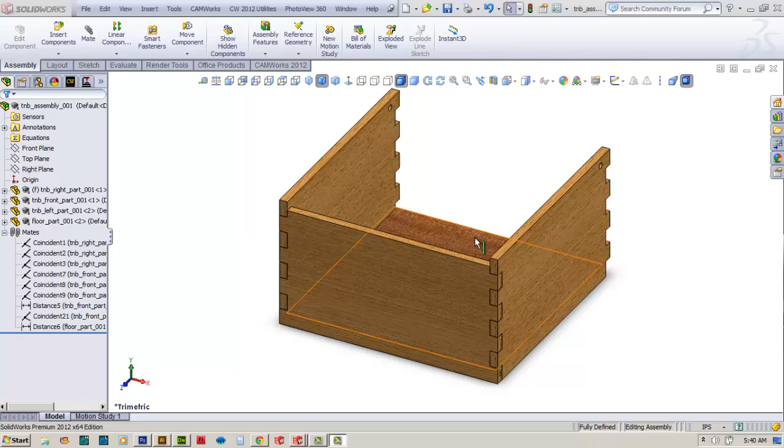As you can see, we're progressing with the design of our table napkin box. I've brought up the assembly so you can see where we're progressing. At this time, we need to come back and design this back wall part, as you see right here. With the back wall part, that will complete the actual shape of our table napkin box, and it will also allow us to move forward with other parts as well.

I've gone ahead and created a new file called Part 7, and I'm going to save it right now so we'll know how to get to that file when we need it later for the assembly. I'll save this in my napkin box 2 folder, highlight the word Part 7, and call this TNB_back_PART. Since I like to do version control, I'll add that in as well before saving the file.

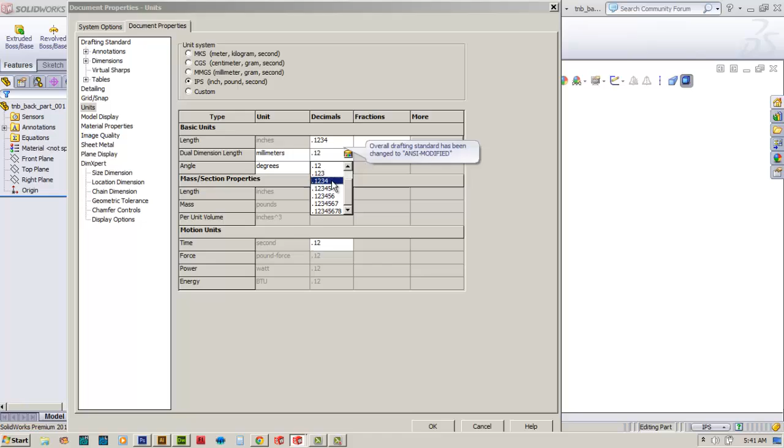Now that I've created this new file, I need to do a little housekeeping first. I'll set my favorite background color to white, then edit my units to make sure I'm at 4 decimal places. I'll click on that, come down to 4, leave the angle dimension alone, set it here, and accept that as well in case I need to do time motion.

Now we're going to set ourselves normal to the back plane. I'll click on front plane here, and it'll help me go normal to it, which will in essence be the back plane that I'm actually creating for my part.

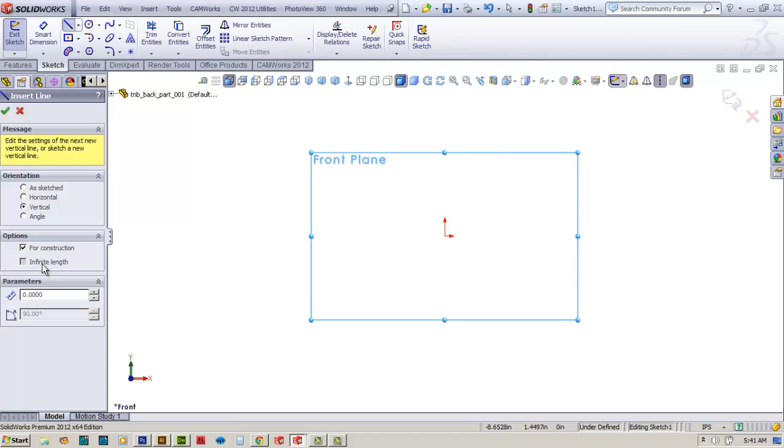With that done, I'll select center line, choose vertical, infinite, and click on the red datum as you see here. As with the other parts before, I'll add a horizontal piece to this as well, and another horizontal center line up here. Check this off, check that off, then right mouse click and go to Smart Dimension. From here, I'll create the distance, which is 4 inches on the height of our box, giving us the working parameters for our part.

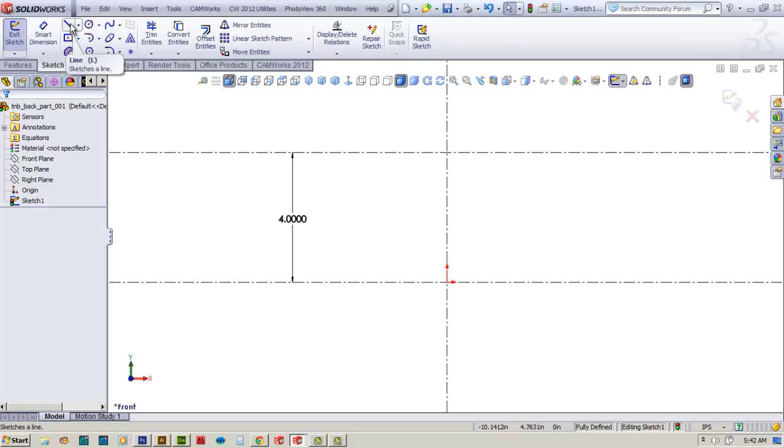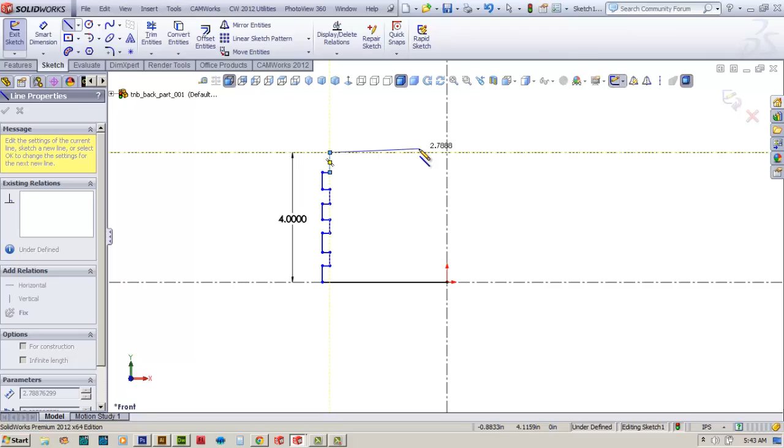Now, check that off. Since I'm still in Sketch, I'll go to the Place Line command. I'll start here at the datum and come across to about right there. I've got to make 4 fingers on this particular part, always trying to keep a little bit under the size I'm working with. I'll come over here and go back to the center line I started with, hit escape, and there we have our basic shape.

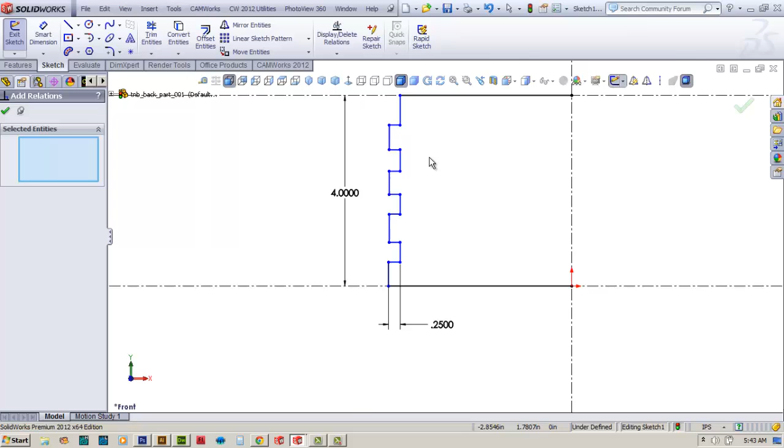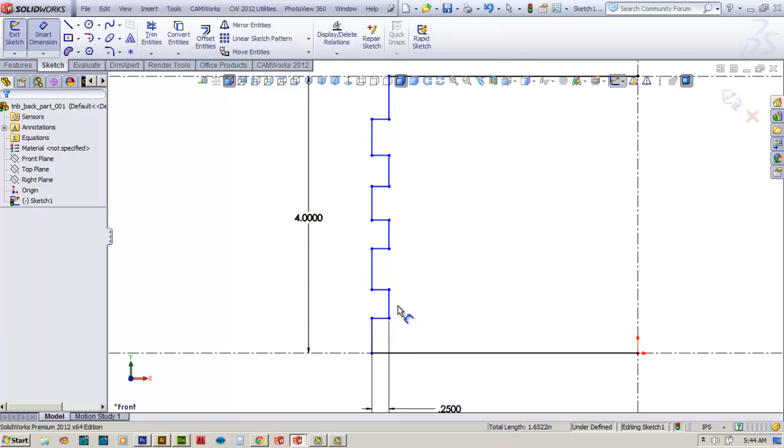So now, as with the other parts, I'll set the dimension and depth of the finger joint itself, taking that up to 1/4 inch, 0.25. I'll check that off and immediately add relations, starting with the first dimensioned one. I'll go up the vertical, grab all these finger joints, and make them all equal as before. Then with Smart Dimension, I'll start dimensioning the actual joints themselves, the fingers, which are about 1/2 inch.

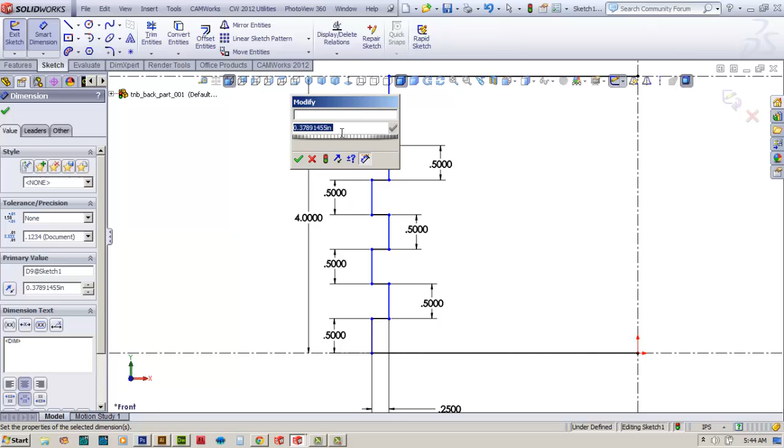I do not have to dimension this last piece right here because we already set the dimension to 4 inches, so that should be sufficient for this side of the design. We'll rebuild our document with Control B, and then save it with Control S.

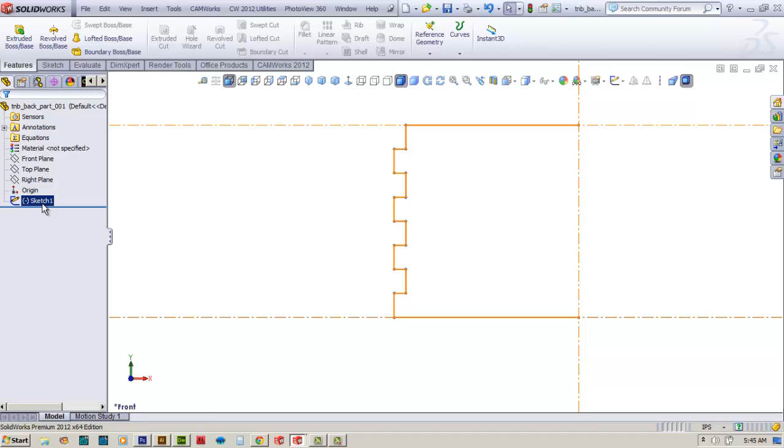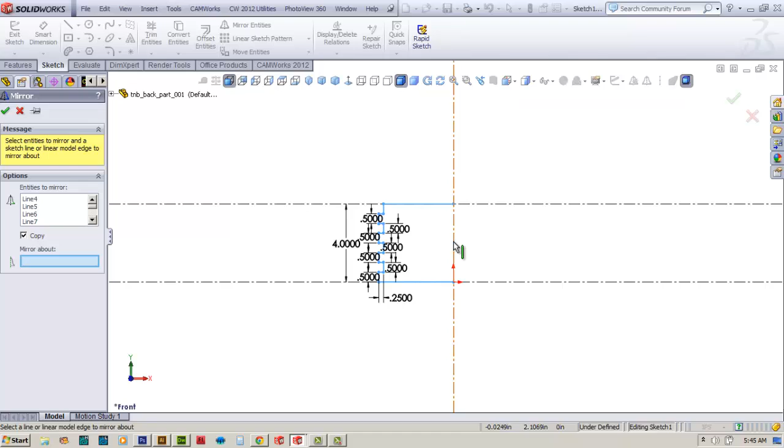Now that the document is saved, I'll go back to my sketch, right mouse click on it, and edit the sketch. I'll zoom out with my middle mouse button, then use mirror entities. We'll use a polygon, left mouse click and drag, and highlight all those, then say mirror about the center line as you see here. Again, it previews in yellow so you can see your intended mirror design. Check that off.

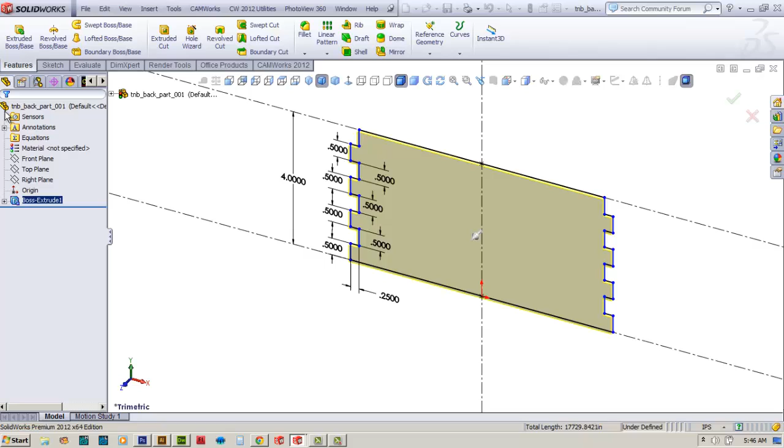While still in sketch, I can immediately go to features and do an extruded boss base. When I do that, SolidWorks rotates around and shows me it's only set to 1/10 of an inch, so I'll increase that to 0.25, the thickness of our wall. Check that off, and the part comes up like we want.

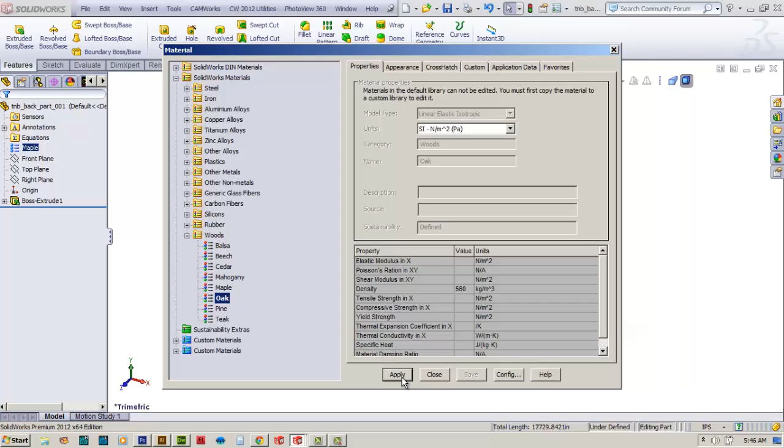The only problem is it's the wrong type of material, so we'll edit that too. I'll go back from making it look like steel by collapsing steel, come down to woods, and grab maple, hit apply and close. Oh wait, we're going to make that oak instead, so hit apply and close. So there we have it, and our wood grain direction is going the correct way, horizontal, so that's good. Control B to rebuild, Control S to save.

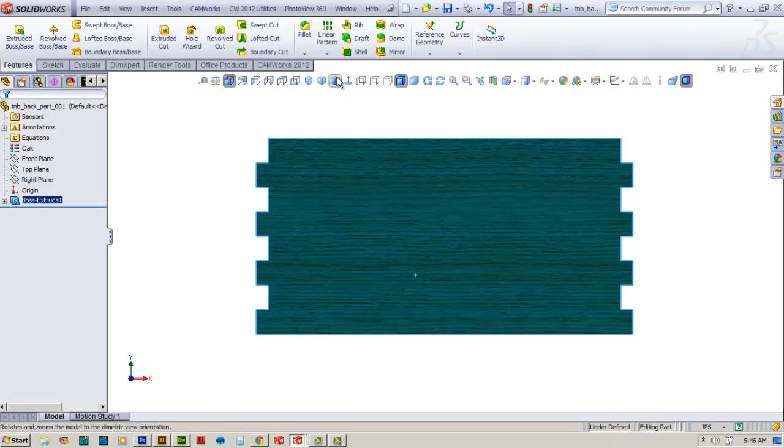Now what we'll do is set ourselves normal to that face. To select the face, you come up here on your heads-up display, or you can right mouse click again and get it off the mouse menu.

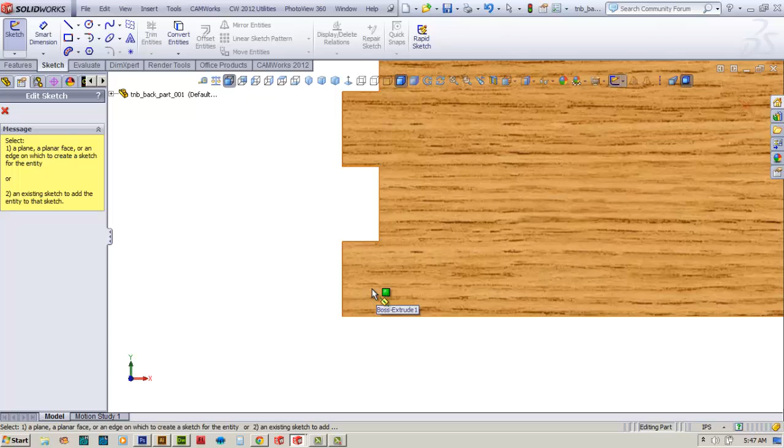With that done, we'll hit Sketch, and this time instead of corner, we'll go to corner rectangle, and come down here making sure it says select the plane, so we'll select that plane again. It highlights in the dotted orange line, making sure not to hit that center point, so we'll come off of it a little bit, scroll out, then scroll back into the area we want, again making sure we don't hit that midpoint so it doesn't set up an unnecessary relationship.

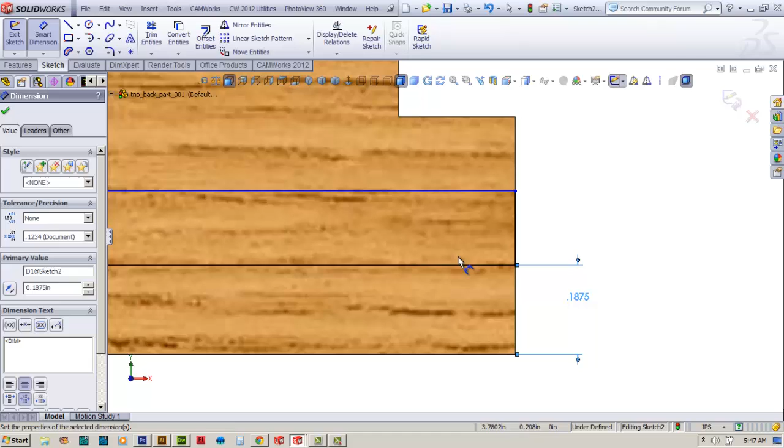So we've done that. Go back to Smart Dimension, and we know the slot we're going to cut for the floor is going to be 3/16 of an inch, which would be 0.1875. And then the slot we're cutting is going to be the girth or width of the blade on our table saw, which will be 0.125, an eighth of an inch. Accept that.

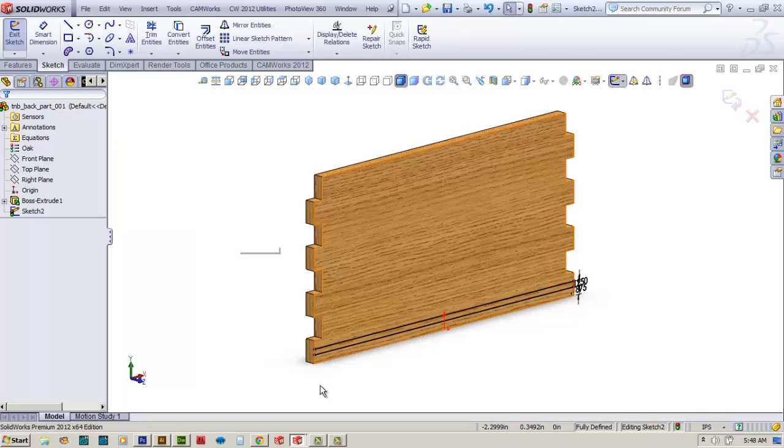Now we'll check that off. Go ahead and hit the F key to fit this. Use our arrow keys to rotate around. We'll zoom in using our mouse, and go to Features, Extruded Cut.

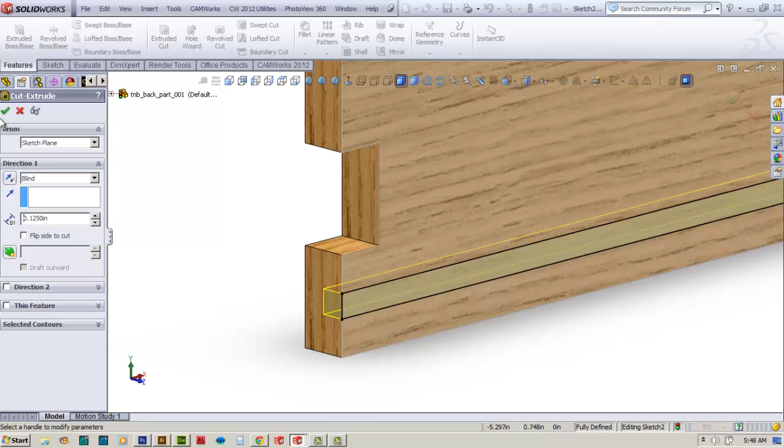Now on the Extruded Cut, because we had 1/4 of an inch last time, it thinks you're going to go 1/4 of an inch again. Easy thing to do there is just put a slash and a 2, which will divide that to 1/8 of an inch. So we've divided that to 1/8 of an inch.

Now we'll hit the F key again and zoom out, do a Control 7 to set it to perspective view. In this case it's going to be the isometric. And we'll go ahead and rebuild and save our file.

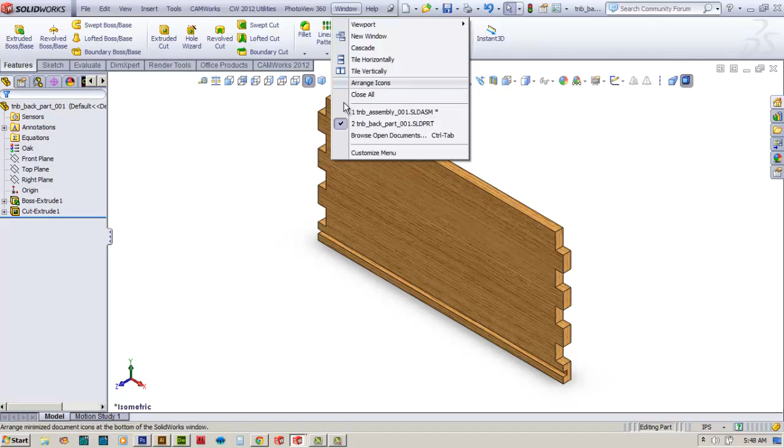Now what we need to do is go ahead and put this part in the assembly. So we'll come over here to the Table Napkin Box assembly, which I already had up. Click on it, and I'll transfer us over there. I'll do a Control 7 here, zoom out a little bit so I have some working room.

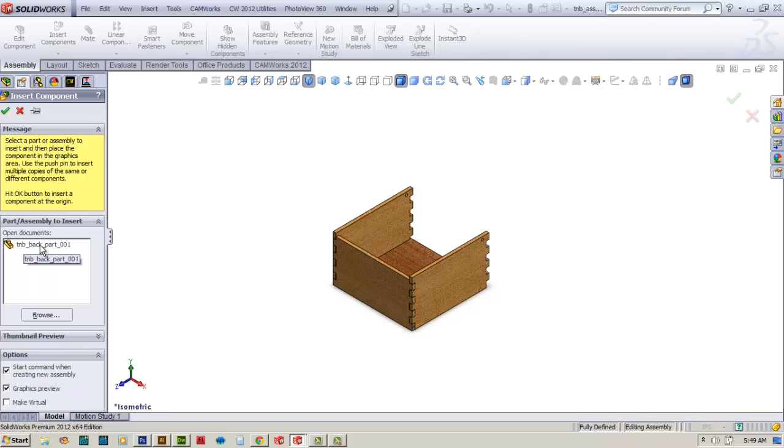I'll come over here to Assembly, make sure I click on Insert Components, and it's going to find that last part we designed, the Table Napkin Box back part. I'm going to come over here and just place it out here in space.

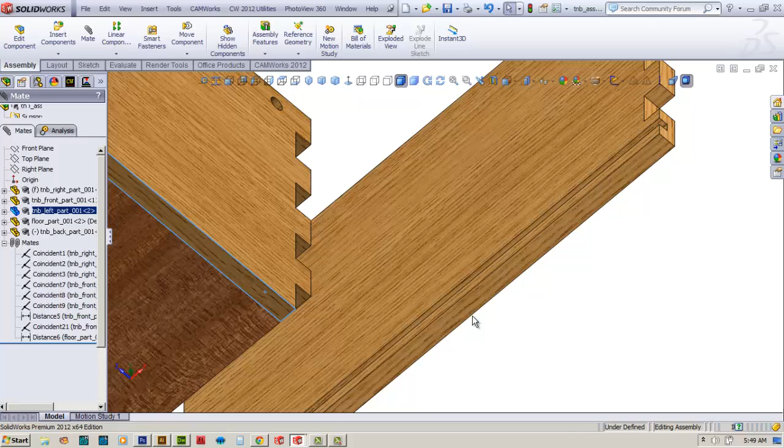Now that it's placed in space, I'm going to rotate with my arrow keys up like this, scroll up here, select the bottom plane on the bottom side there, because I want to make a mate where this part, the one on the box, is on the same plane as the back part is. So I've done that.

And now while I'm in this view, I'll select this face on the left side of the box and select the outer edge of one of those fingers and click on it. Accept that. Go ahead and do a Control 7 to see it back in perspective.

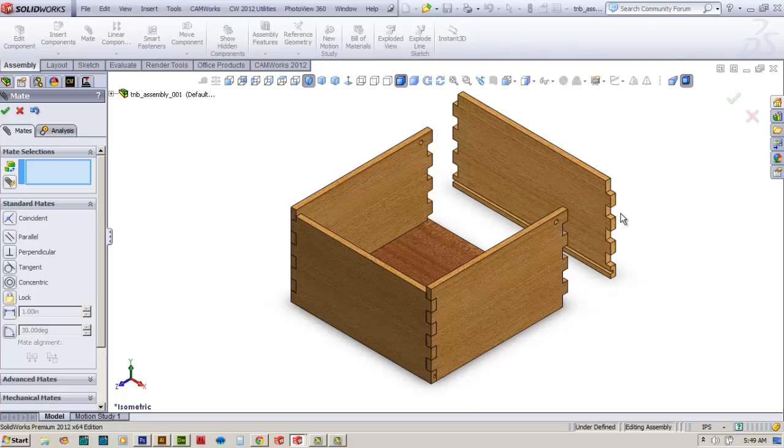Looks pretty good. So now I'll select this face here, rotate around, and select that face right there, and the part will come up and mate to that. So let's do a Control 1 and see what our part looks like.

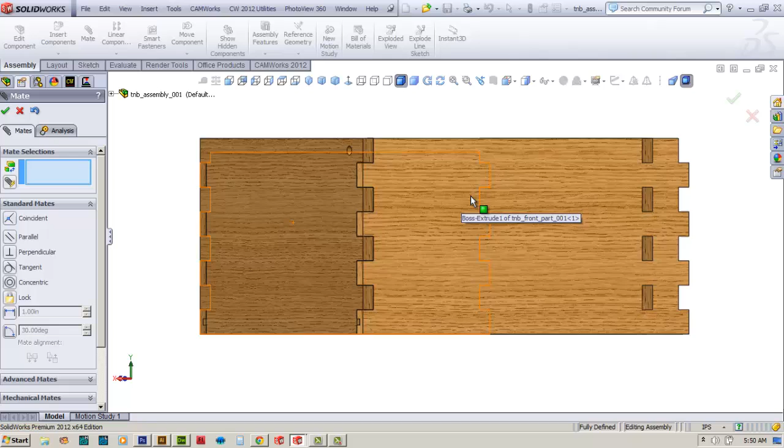Well, we've got a problem here. I think we missed a dimension. No problem, we can fix that. So this is a good opportunity to see a mistake and how you can go back and fix it.

With that said and done, we'll go back to Window and go back to our original part. I think I know which dimension we actually missed. Ah, yes. So we'll come back over here and go back to the original sketch. We'll roll this up here, go to this sketch, and edit that sketch. Now I'll rotate this around so I can see it.

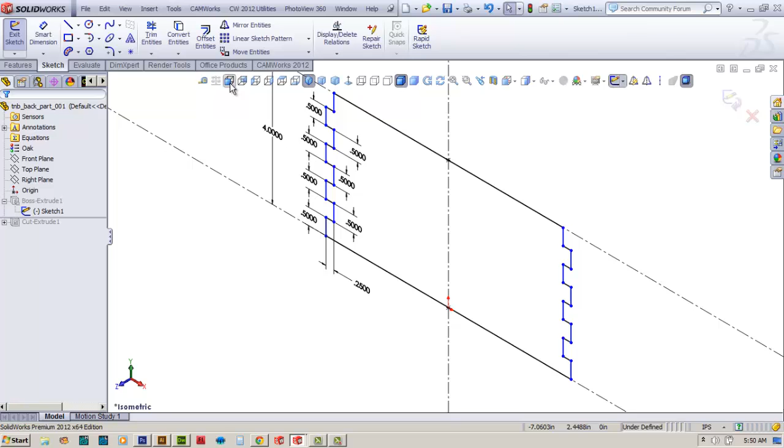So I'll go to the front view here, and we need to come in and put a dimension in, one we forgot, or I forgot. So I'll come up here and click on this, and scroll down here. Actually, I'm only going to get that one side, but since I'm there, I'll go ahead and work with that.

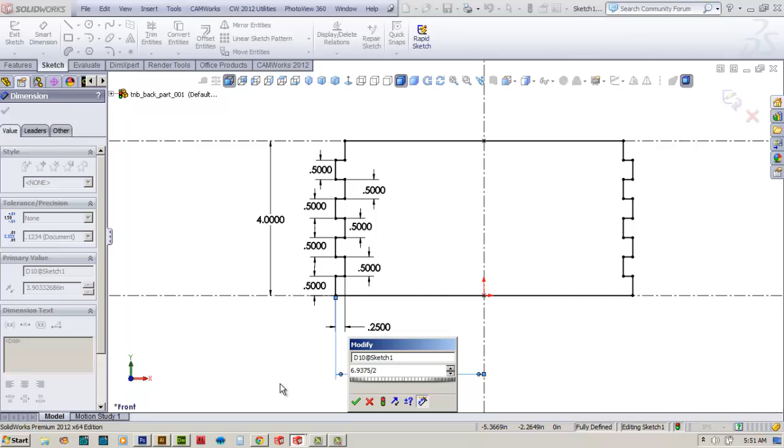I know the overall dimension is 6.9375. I'll go ahead and put that divided by 2, and what that's going to do is adjust the actual overall dimension of the part. That's good. So we'll go ahead and check that off.

We'll do a rebuild again, and we'll do a save, of course. Go ahead and do a Control 7, see that part in 3D. I'll just go ahead and save that one more time.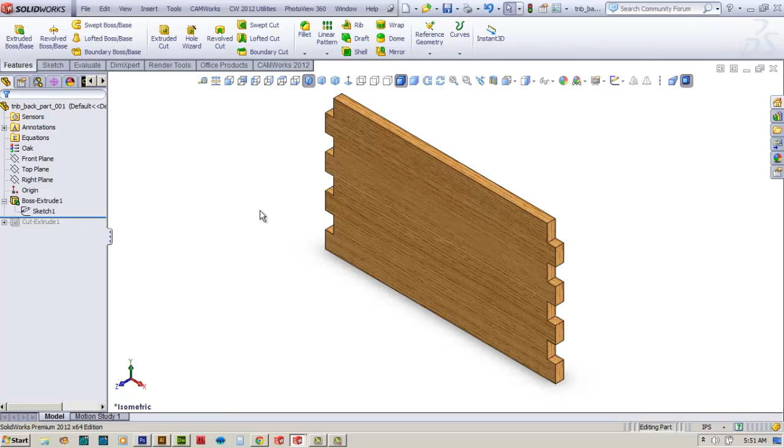Now what I'll do is come back over here to Window and go back to my Table Napkin Box assembly. It's asking me if I want to update that. Well, yeah, sure I did. So I'll go ahead and update that. And now you can see the corrected part that we went ahead and done. So that looks pretty good.

So let's go ahead and save our assembly right now. First, of course, rebuild, and then we hit save. And we'll save that.

Okay, we're done for now. We'll come back and start working on the top of the lid.